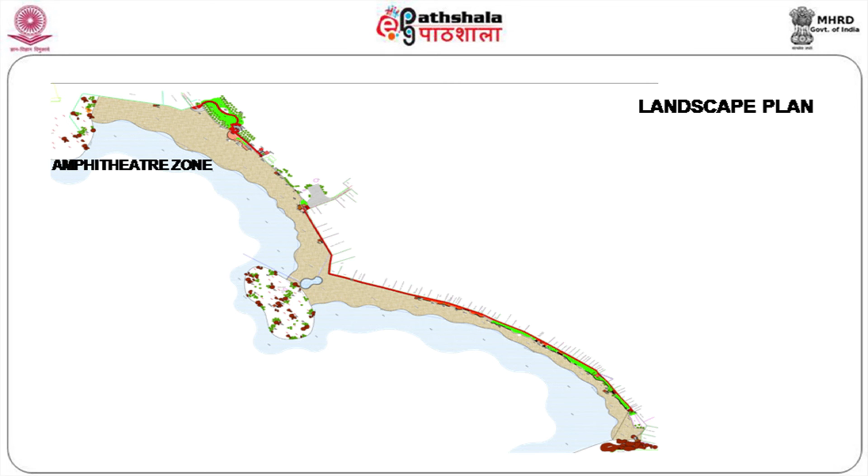Lifeguard station, how does it look? These lifeguards will be used mainly to protect the people from washing away or getting choked in the seawater.

Then you have information kiosks, and police kiosks. It's such a large public space, you also need some protection from the police.

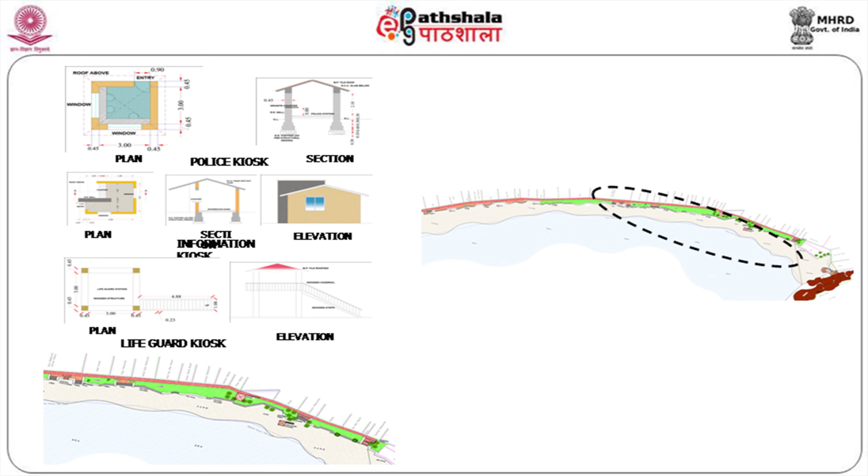Then the next zone, open showers are provided for people after having a bath in the sea. They have an open shower and can change their dresses. Entry plaza, how the plaza connects to the different areas.

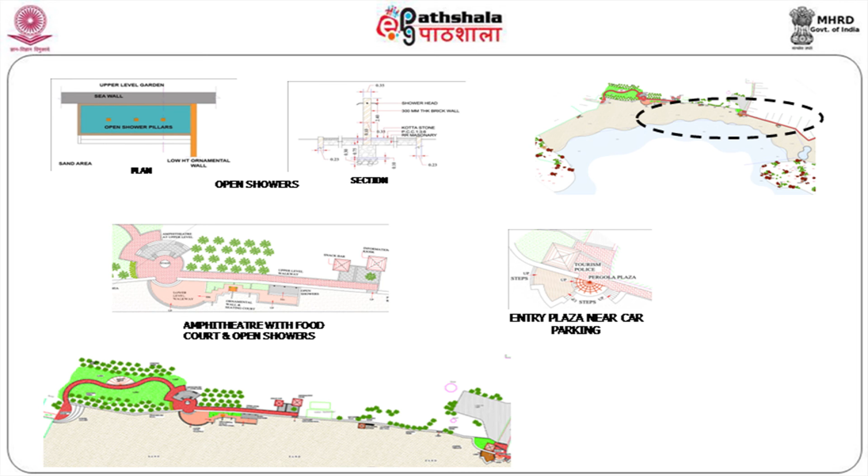Amphitheater with food court and open shower. You have a small amphitheater for people to have a performance act or birthday party or any such local activities, plus a shower point for people to use and go back.

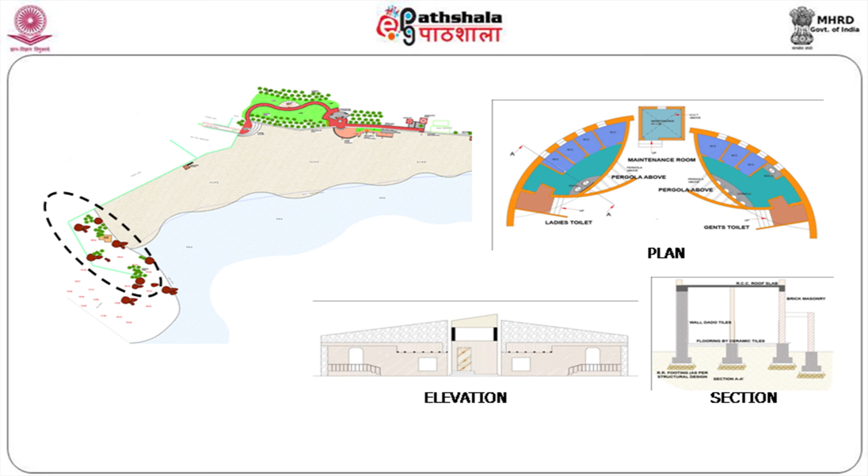This was created as a PowerPoint presentation initially. But this is what it actually looks like also, the same look is there. We can show you the photograph in the end.

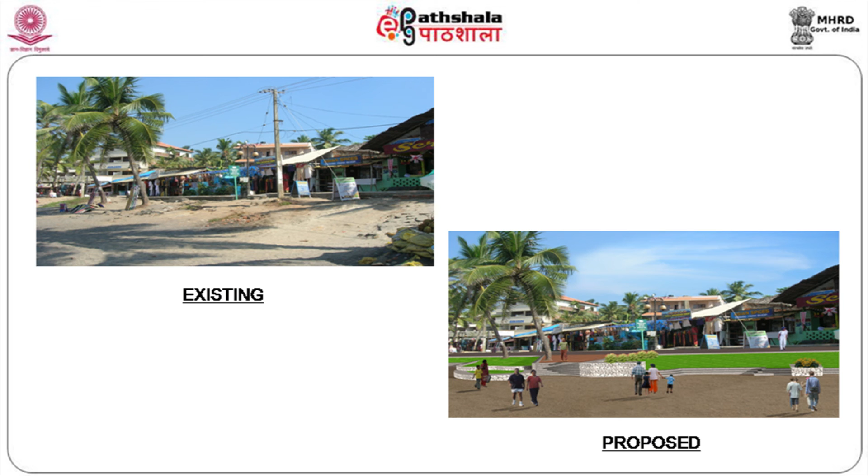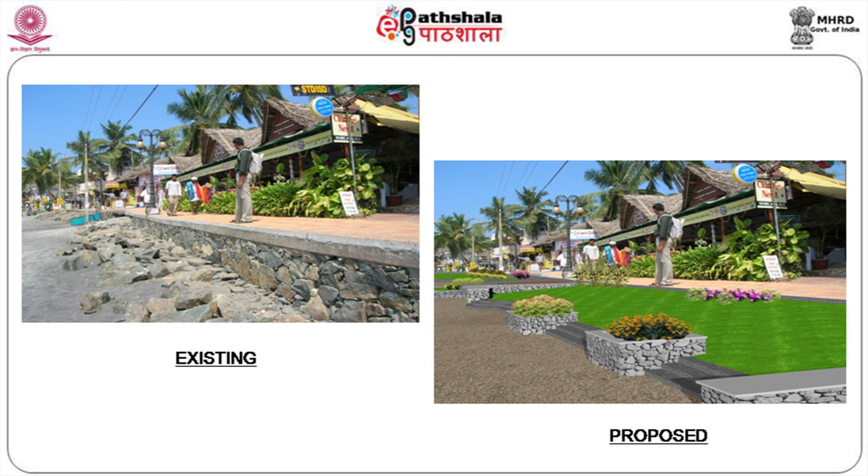You can see only dry packing everywhere. Seats are provided for seating purposes, and steps are also provided for seating purposes. This is the last entry point, at a different level. We have to use a little bit of imagination to connect this zone with other areas.

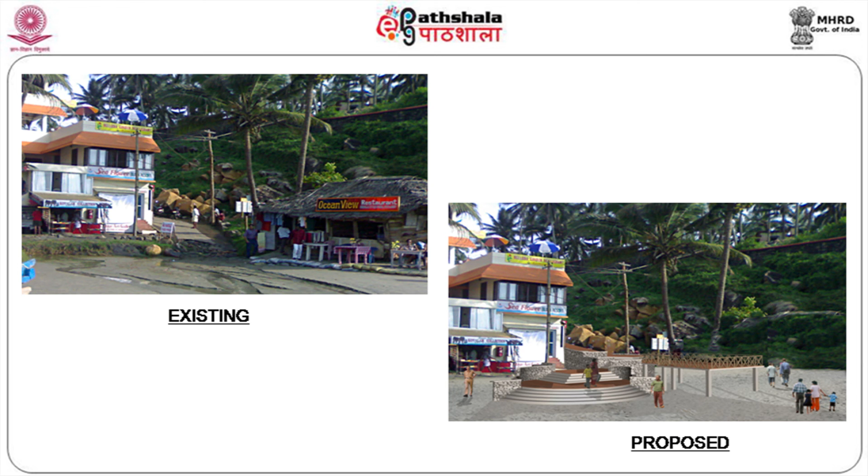There is too much of a level difference, so we have to really have a proper slope. Handicap ramp and everything needs to be taken care of here.

We are now going to talk about provision of a walkway in the Veli Beach and then in the Varkala area. In Varkala area, the walkway comprises of almost 4 kilometers covering different terrains and different land.

Varkala beach is a very, very scenic beach with a very high cliff available, and you have to create a very safe walking place for the people. This means provision of different activities, viewing galleries, viewing towers, sitting and watching areas, shopping areas, lifeguard stations, and all those facilities have been provided for the people to enjoy.

Whereas in case of Veli, we had a raised walkway, really a very adventurous sunbathing place for people to enjoy. This raised walkway also helped people use this 1.5 kilometers of walkway in a different way, and you have not disturbed the fisher folks from their regular activity of going into the sea and fishing. Because of the raised walkway, they never had any problem, and there are enough bridges in between for people to take their boats into their houses.

A viewing deck and other things have been provided. You can see the photograph and see the places.

Now we will talk about the beach landscaping. This is also more on the urban landscaping side. What is more important to understand is that connecting walkways need to be created for a distance of around 4.5 kilometers.

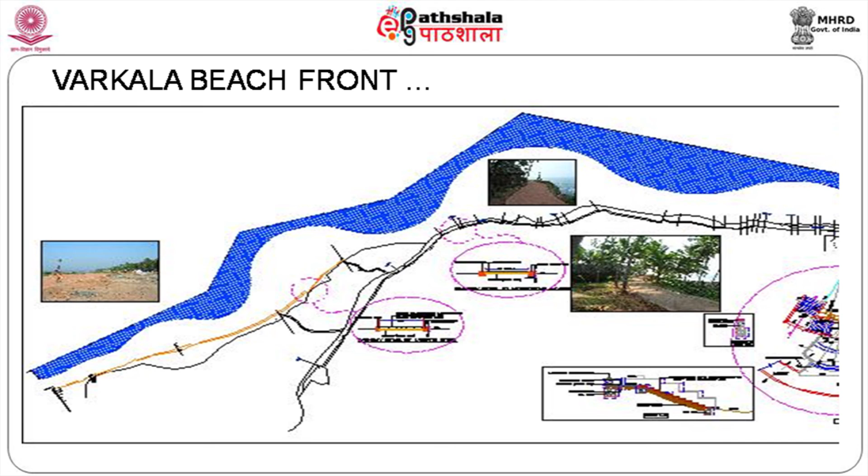So you can see the proposal. Steps are provided at different levels, walkways are created with local material, and you have some viewing decks with shops and other things created. You have connecting walkways—you can see the drawing, basically a seating area with a view to the sea.

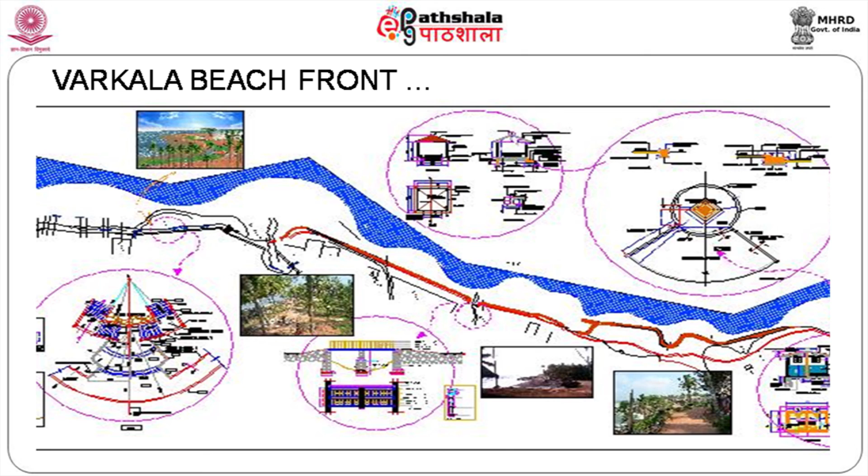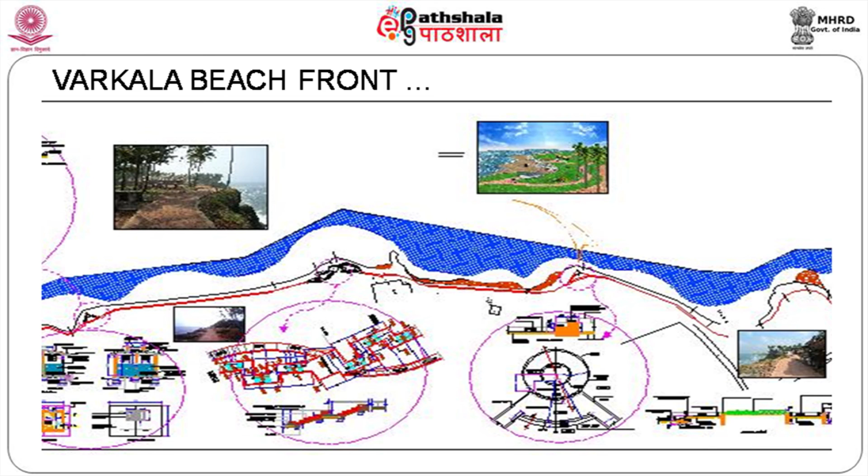Different types of seating areas and different types of walkways and breakaway spaces. Pathways and steps are created in such a way that you won't go to the lower level straight—you will go in a zigzag pattern so that you won't feel the pain of climbing down or climbing up. That was the basic intention.

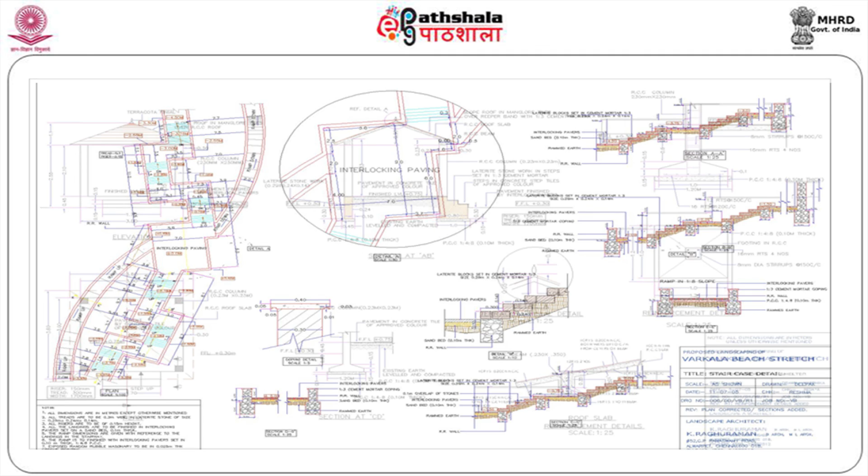And in between you also provide some rain shelters so that during the monsoon people can take shelter under the rain shelter.

A different way of how you get down to the different levels, and now, after the development, how it will look.

A clean walkway has been created with a swale for the rainwater to move around, and you have natural stones available. This is what I was talking about—a swale, so that your rainwater is not interrupted by your walkway.

Connecting to different levels. A clear walkway with a swale, which I was telling you, for the rainwater to go around. The cliff, edge of the cliff. With the sharp and rural environment for the walkway.

What does the beach do? Beach is an urban open space for the public. So people have to come there, sit and view the beach, then put their feet on the water. Maybe if the beach is safe, they can have a bath in the beach. So all those lots of activity take place in the beach. Plus you have fishermen folk collecting the fishes from the beach, and you have boats available all along the shoreline for them to go into the sea and do fish harvesting. So beaches are very, very important as an open space for the public.

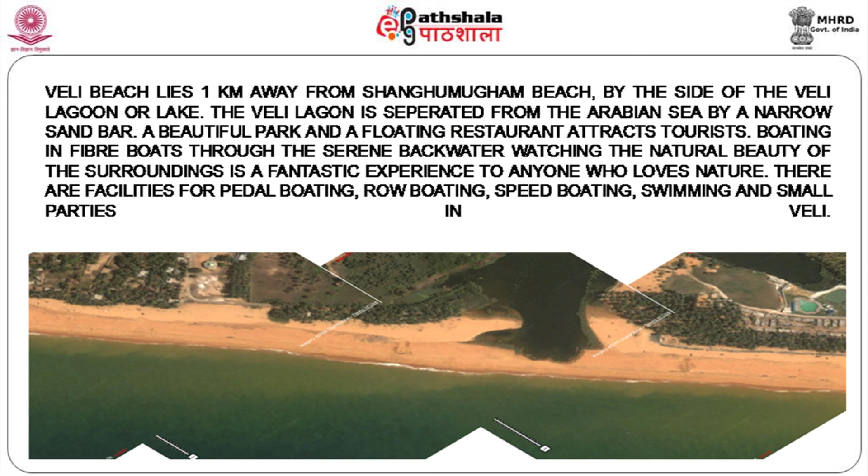Whereas on the beach side, we need to have some kind of an entrance plaza, a walkway, a higher level walkway is required, and then we have to create a node for people to sit and view the beach. Plus you need to have some kind of information kiosk, police kiosk, food courts, etc. are all required. Plus you need a rain shelter also, which is very important in this kind of coastal landscape along the Kerala coast.

So you can see from the drawing we have hard landscape, only hard landscaping is being suggested here. So how and what are the basic requirements here? We have different angled walkways, and more of a creation, it's a designer's creation.

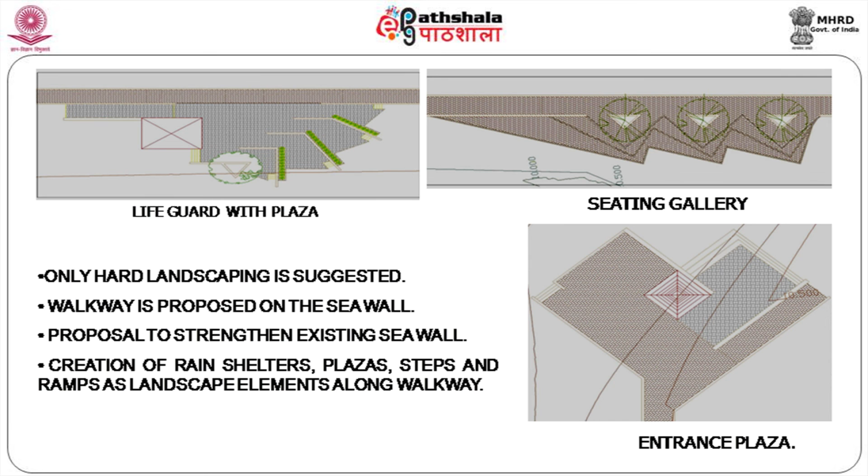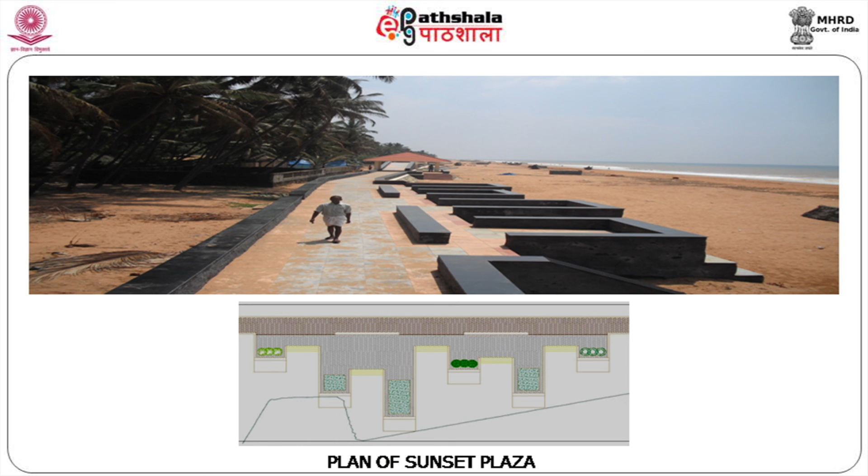The work has been completed also. You can see the seating arrangements provided, like continuous seating arrangement for the people with a walkway, and you have a rain shelter. You have a completed rain shelter with a walkway, steps to climb down to the sea, and continuous sitting arrangement available, and different levels are created so that people enjoy walking in the upper level and lower level.

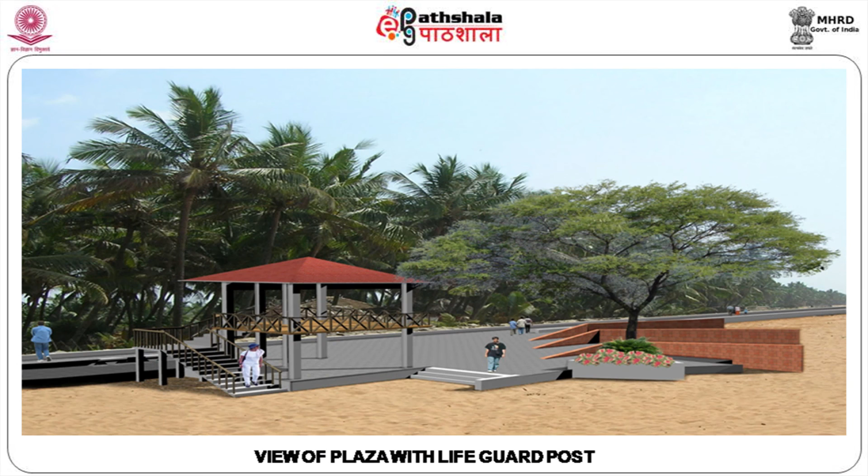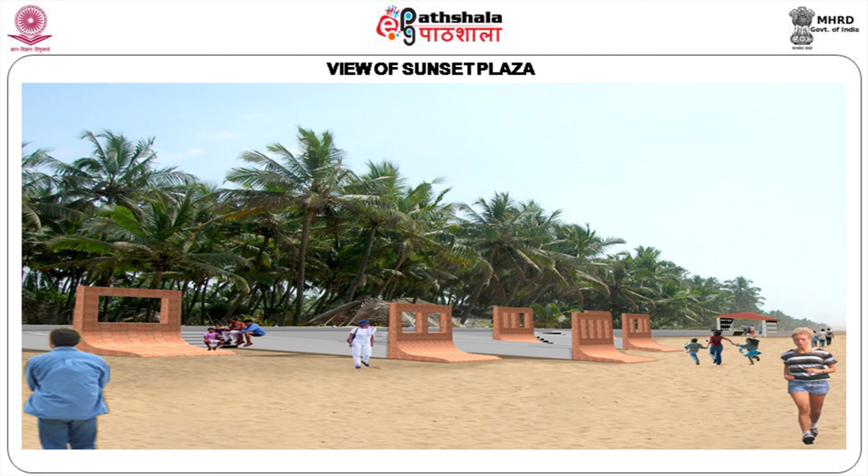Colorful paving pattern, you have nice tiles, anti-skid variety, flight of steps for the people to come down, different angled seatings, conceptual level drawings, but you have seen earlier how it was completed also. They're all conceptual level drawings.

Both the beaches are very dynamic beaches, people enjoy them. In Veli, it is only 1.5 kilometers of length of walkway. In Varkala, it is 4.5 kilometers. Whenever we go to Varkala and enjoy the place, I always walk from here, ask the car fellow to come to that 4th kilometer. You walk and enjoy walking at different levels, and then go into the other place, car will come and pick you.

In Veli also, the same thing. Veli has got a very nice garden space with adventure sporting, like you have speedboats available in Veli. You have floating restaurants available. You have a floating bridge also, a very innovative floating bridge is also available in Veli. So all these activities and this particular walkway add to the attractions of the tourists and improve the tourism facility in this zone. Thank you.